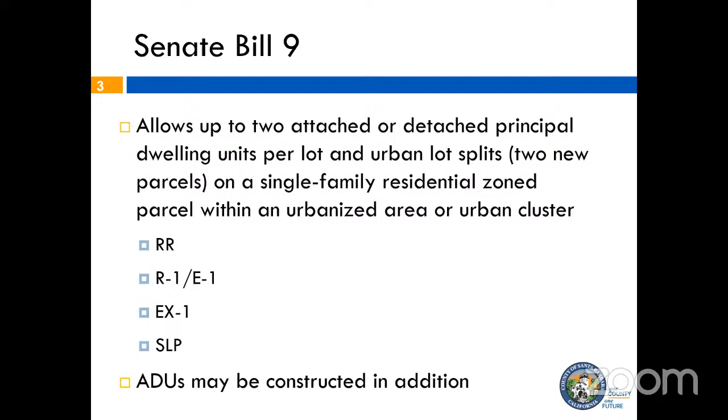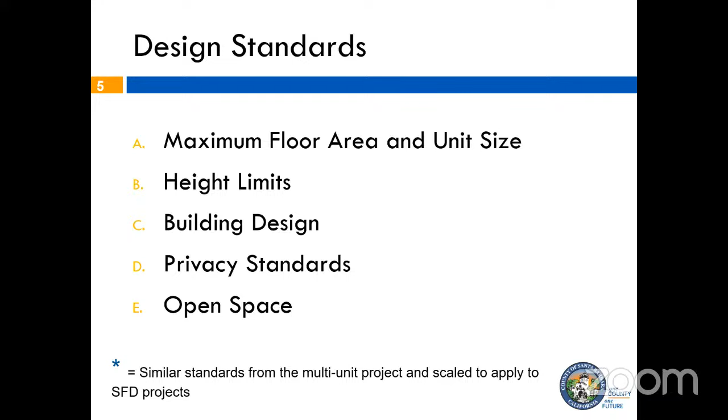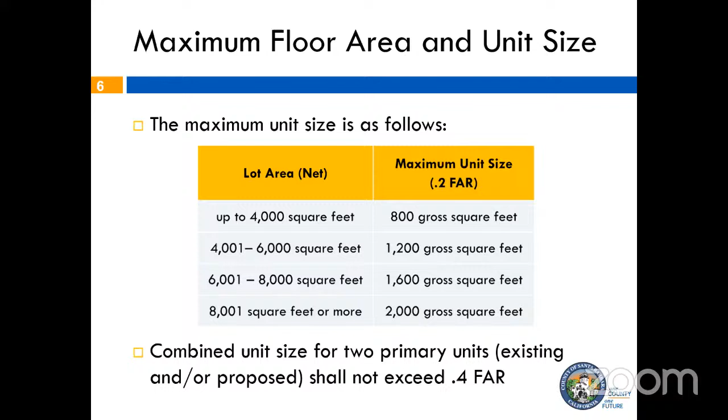Additionally, we propose to allow up to 500 square feet for an attached garage or carport with standard setbacks and the same architectural design, as well as an allowance of 20% of the floor area for the new unit to have an attached architectural feature such as a covered patio, porch, or deck. This is an approach we actually took from the ADU ordinance and carried over.

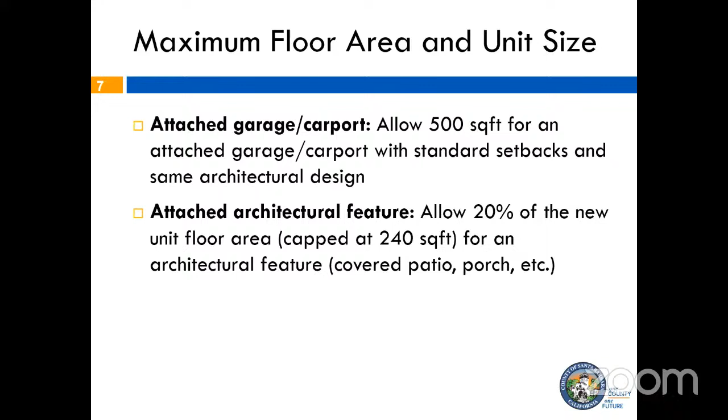For height limits, staff tried to find an appropriate limit that would still allow reasonable development while protecting neighborhood compatibility. We propose that new attached dwelling units not exceed the height of any existing primary dwelling unit on the parcel, or 25 feet and a maximum of 2 stories, whichever is greater. New detached dwelling units shall not exceed a height of 25 feet and a maximum of 2 stories. All new dwellings, attached or detached, would still need to comply with other applicable height regulations such as ridgeline, hillside guidelines, and height limits.

We also have one question to consider, which is whether to continue to allow an additional 3 feet for pitched roofs within the height limits.

Next slide. You have a question? Could you repeat the last sentence, please?

The additional 3 feet? Yeah, so we included for feedback that we would like to continue to allow an additional 3 feet for pitched roofs to be included in the height limits as part of the standard.

Just for context, she's talking about the ordinance where if you're on a hillside ridgeline, there's a maximum height, but there's a height exception where you can add an additional 3 feet if you have a certain pitch of roof. You see it most on hillside ridgeline lots where there's a max height of 16 feet, but they can do 19 feet with a certain roof pitch. This would just carry that same allowance over to this type of unit.

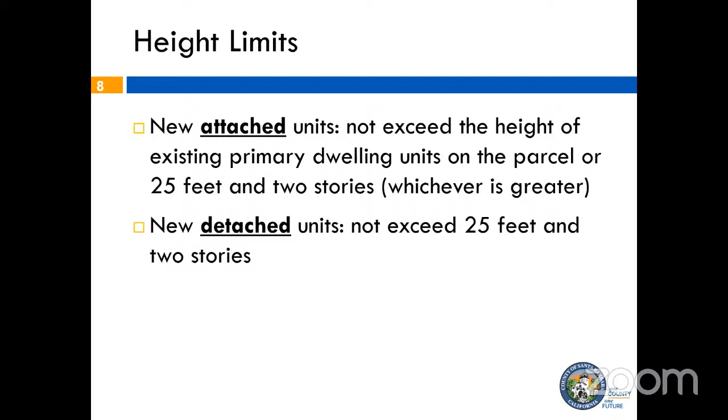All right, can we jump to the next slide and then jump into building design? Great. So for building design, for additions and new attached units, we propose that they be designed and constructed to match architectural style, colors, exterior building materials, and finishes. This would include siding, windows, doors, roofing, and so on.

Oh, the additions, okay. And then for all sides of the buildings, we propose that they shall be articulated with common details, materials, and elements. Also, for building facades greater than 30 feet in length, they shall include architectural elements such as a front porch, a balcony, an upper story setback, projections, recessions, things similar.

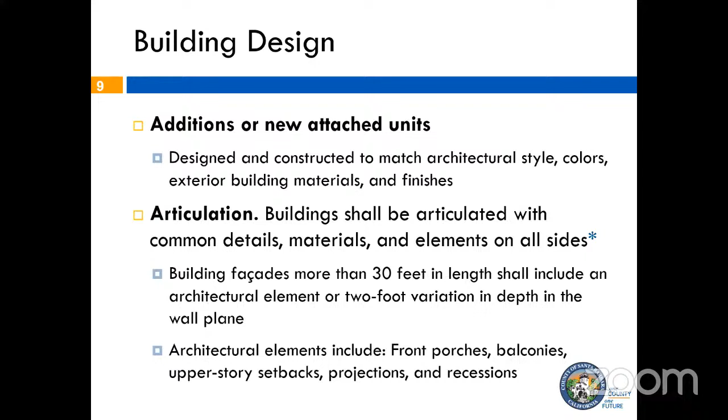Next slide. We're proposing that they incorporate recessed door and window openings, with a minimum of 6 inches for garage doors. All entrances shall have either a projected sheltering element or be recessed from the main facade, with the projection or recess having a minimum depth of 24 inches. For windows, they shall be either recessed at least 3 inches from the plane of the surrounding exterior wall, or have a trim or windowsill at least 1/2 inch in depth.

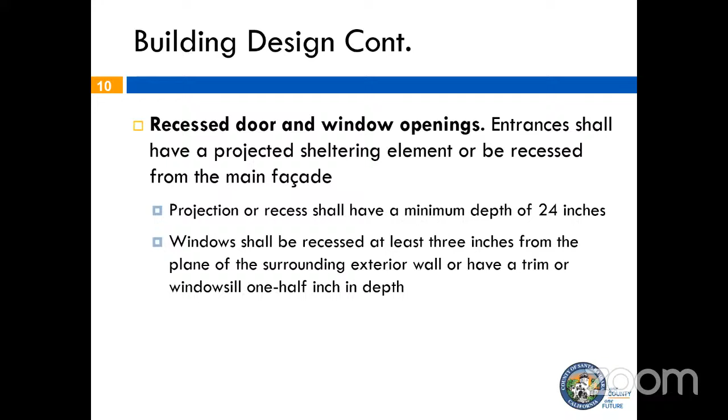We're proposing that exposed plywood or glass curtain walls be prohibited. The building must include at least 2 paint colors: one for the main wall color and another for architectural trim pieces, such as siding material.

For window frame materials and colors, they shall be used on all elevations. Do you mean window trim detail materials, not frame? It can include frame materials and also trim. If that's language you'd like us to add as feedback, we can include it. Being consistent on all elevations would be better, for both frame and trim materials and colors. Okay, we'll consider adding that in.

For transitions between colors or materials, they shall occur at inside corners of intersecting walls or architectural features. Before I jump to the next slide, do we have any feedback or comments on this?

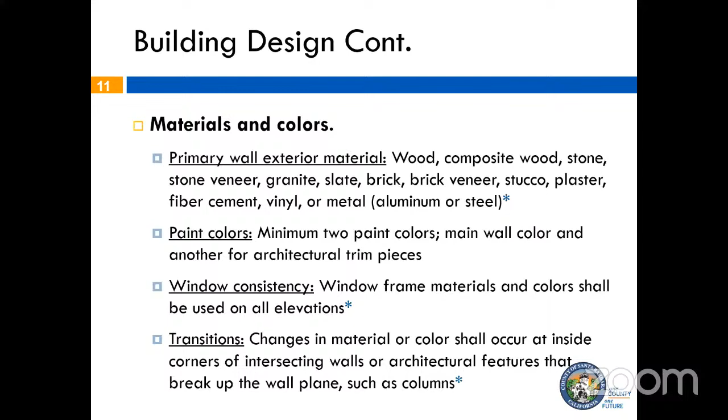For garages, they shall feature at least windows, a paneled door surface, 2 different colors, or alternative materials and finishes. What do you mean by treatments, 2 different colors? Does the garage door need to be multicolored? There are different options you can do. You can feature at least windows and a paneled door surface. You can propose 2 different colors for your garage, whether that's a specific trim around the windows and a different main color, or use other types of finishes and treatments. So there's flexibility on what can be used for the garage.

For sloped roofs, we're proposing at least 2 forms, whether primary and secondary. Shiny roofing and siding materials or glossy metallic finishes would be prohibited, and we'd propose a light reflective value percentage below 0.84 with a matte finish. For garage conversions, they shall replace the garage door opening with exterior wall coverings or residential windows and doors to match the existing exterior of the garage or residence.

Are we going to pause to talk about the garage conversion situation here? Sure, we can take some questions.

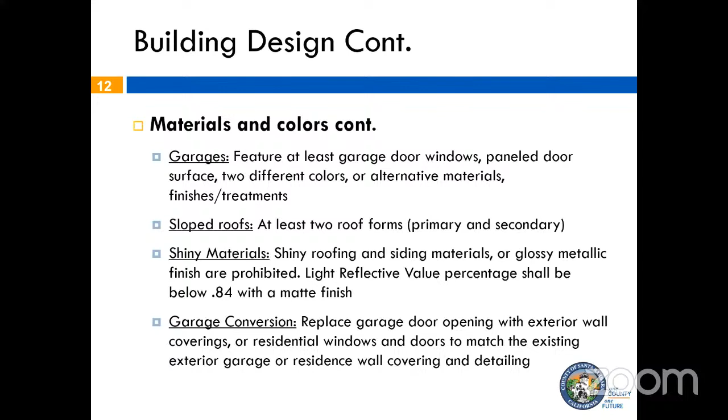For privacy standards, we're proposing to implement privacy standards for primary dwelling units that are either 2 stories tall or greater than 16 feet in building height. For example, any upper story unenclosed landings, decks, or balconies greater than 20 square feet that face or overlook an adjoining property shall be located a minimum of 10 feet from the side and rear lot lines and interior lot lines, unless landscape screening with a 6-foot minimum height is provided along the perimeter areas visible from the landing, deck, or balcony. We did receive feedback about increasing that 6-foot minimum height, so we're open to suggestions on that standard as well.

Is the 10 feet from the side the deck or the building setback? That would be the deck - so the deck has to be 10 feet away. Yes, it's 10 feet from the side and rear lot lines, as well as interior lot lines.

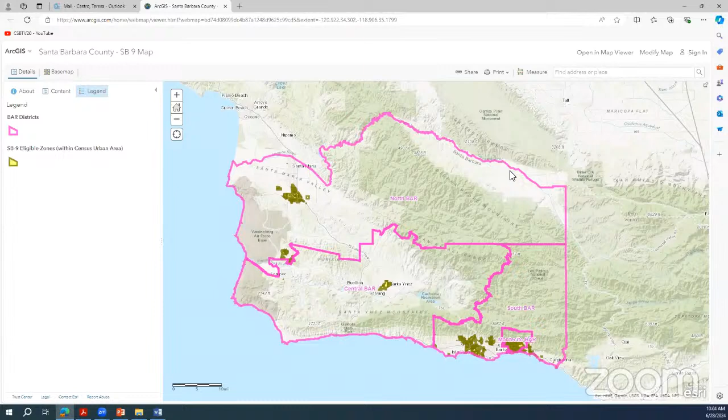Oh yeah, it's horrible over by there. No, we see that already. I mean, people can already basically build an ADU on almost any residential lot if they want to.

Great, thanks Teresa. So this is just an overview of those single family zoned parcels that would be eligible for an SB9 project. The link is provided to you guys in the box folder, so you can look at it at a later time in more detail. It's almost entirely the same. You can zoom in on each lot. It's kind of cool, the interactive.

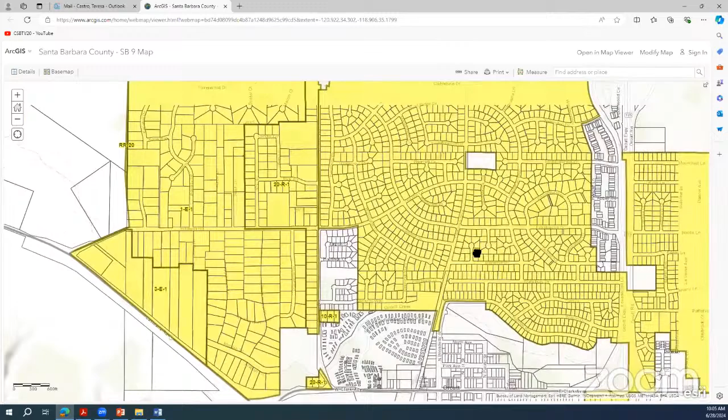So just as a quick overview of what has been provided to you guys. Teresa, do you mind pulling the presentation back up, please?

Shannon, can I ask you a quick question? Why are those other lots not eligible?

Karina, do you want to take that one? That's a mobile home park. So the parcels designated and labeled yellow that you see on the map currently are all RR, R1, E1, EX1, SLP. The state mandates that it's a single family residential zoned parcel, and these are those eligible parcels in these zones.

Teresa, go down on the picture. Okay, stop right there, I have a question. On the bottom left portion of the screen, there are actually 3 distinct different communities in a fairly large square, and then there's yellow in the middle. It looks like somebody's pointing their finger and bending it down to the right. So Oak Hill, actually there are 3 different communities, right?

To the left there is the old Elkhorn Golf Course. Then there's a portion of Oak Hill, which was an original portion of it. That's the yellow square piece, like the base of the finger. And then there's the finger.

Now why are the lots in the middle zoned yellow and the lots around it not? They have different zoning. But the zoning's the same. It's probably... that's zoned E1, yeah, it's because it has to be both zoned for that as well as be within the census tract for being an urban area.

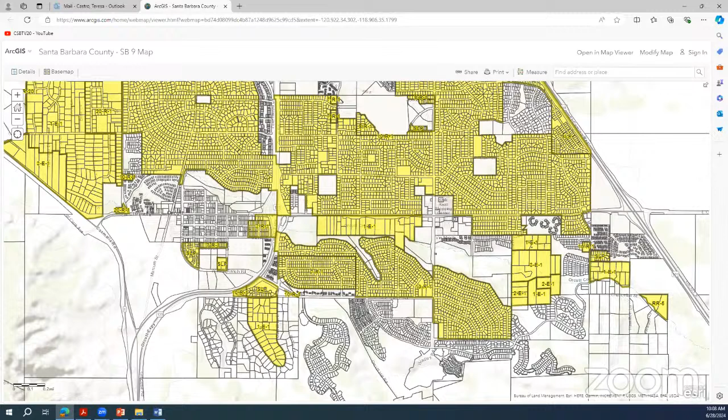All right, let's jump back to the PowerPoint. What's the timing on proceeding to the planning commission on this? After today, are you going to planning commission, or do we have additional time to provide better analysis from our end of the objective design criteria?

I think we still have a bit of time because we do need to collect all of the feedback that we've received and solidify the standards before we go to the planning commission. So we are anticipating going to the planning commission probably by the end of the summer, potentially sooner. We need some time to solidify the standards.

Yeah, this is the first time we've seen any of this, so that's at least understandable from my personal perspective. I would like to take some time to analyze some of these requirements and how they might be implemented, because I've seen this in the past in the city of Lompoc and in other communities where a bunch of new ordinances get thrown in there and nobody really understands how they're going to be implemented until you actually try to implement them. It can be really chaotic, because then you create a situation.

For instance, I had a project where it had a single family house and a 2-unit building on the backside, and the requirement was to provide bike racks for multifamily. They considered the 2-unit in the back as a multifamily building, requiring a bike rack, where all 3 units had garages, but the single family house was not required to. So the implication there is that a person living in a single family house can figure out how to put his bike in the garage, whereas the individuals living in the duplex in the back could not figure that out. Which was sort of a ridiculous requirement when it boiled down, although the idea originally was that for large multifamily projects, like 40-unit apartments or something, would provide storage areas for bicycles. It was never considered to be a little duplex sitting on a lot that would need a bike rack outside.

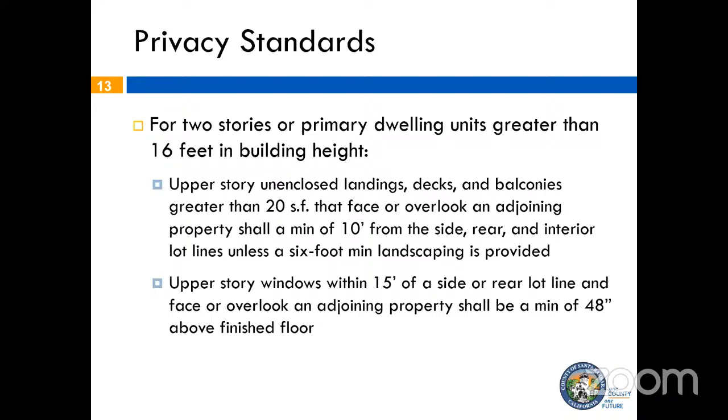Great, thank you. We're just going to jump into the next slide. I want to remind you all that we do have the telecom ordinance standards as well that we need to go over, so just a heads up.

For open space, we are proposing that private open space shall be provided for each residential unit at a ratio of at least 300 square feet for units that have 2 or fewer bedrooms, and for each bedroom in excess of 2, they shall require 100 square feet per additional bedroom. As I mentioned previously, this private open space must be directly accessible to the dwelling that it serves. It can be within the side and rear setback areas, but it cannot be in the front yard setback, which shall not be used to satisfy this open space requirement. Also, balconies, patios, decks, and unenclosed porches can be used toward this open space requirement.

This is either paved or landscaped, right? If it's, yes, it could be uncovered, paved, or landscaped patio space or open space as well, like a grassy area for example. One thing to note is the minimum width of this open space area shall be at least 10 feet.

And this is the last standard for Senate Bill 9. Before I jump into telecom, is there any comments on this open space requirement that we're proposing? We talked earlier about landscape. Is there any landscape requirements that you're proposing?

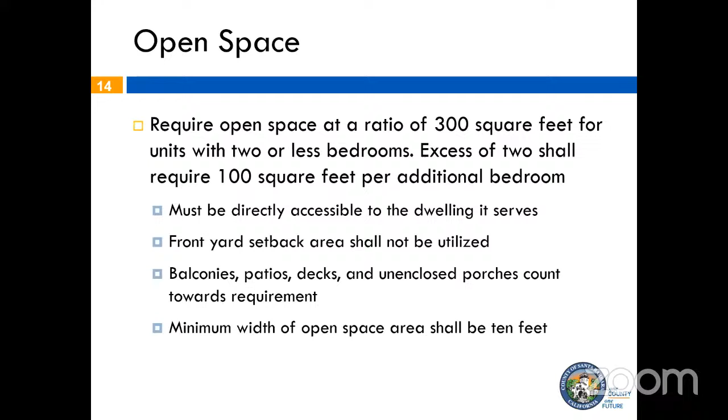Great, can we jump to the next two slides? Thanks, Teresa. All right, so for small wireless facility projects that would meet these proposed objective design standards, they would be exempt from design review. These proposed standards would essentially take the place of the BAR design process, and would apply to facilities mounted on structures 50 feet or less, located on existing or replacement utility poles, non-pole concealment structures, roof of an existing structure, or vaulted underground.

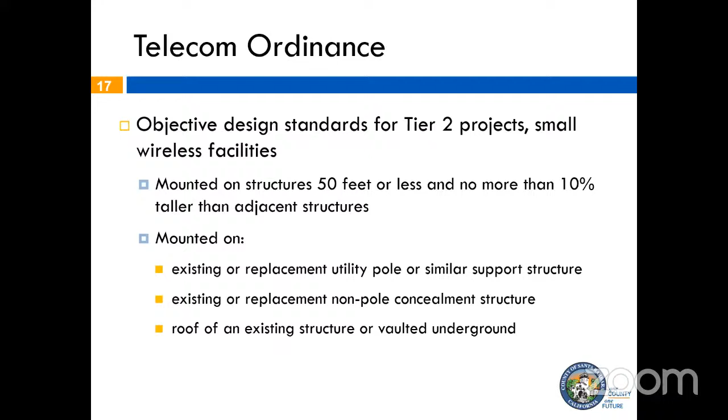Next slide. And here's just a list of the design standards I'm going to be going over. Next slide.

So we're proposing that all small wireless facilities be stealth as technically feasible, with concealment elements that mimic or blend with the underlying support structure, surrounding environment, as well as adjacent uses. So for new installations, antennas and associated equipment shall be fully concealed within the structure. And if concealment is not compatible with a pole design, it must appear as an integral part of the structure or mounted as close to the pole as technically feasible.

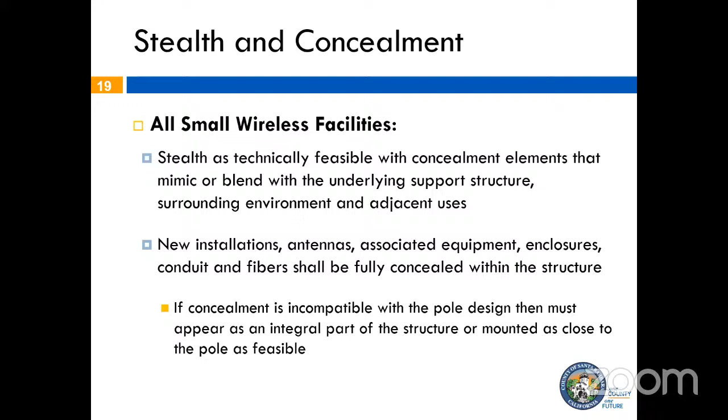Next slide. So for all cables, wires, and other connectors, they'll need to be routed through conduits within the pole and concealed from public view. Any external conduits or shrouds must be finished to match the underlying pole. Excess cables shall not be spooled, coiled, or stored on the pole's exterior. And then for pole-mounted accessory equipment, they may be installed behind street, traffic, or other signs, but must be placed in a location that is most concealed.

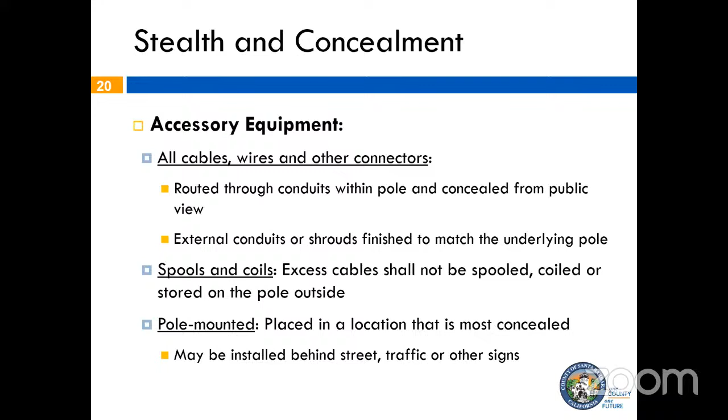Next slide. So all exterior surfaces shall be painted, colored, or wrapped in flat, non-reflective hues that will match the underlying support structure, and also treated with graffiti-resistant sealant. All new poles or structures will need to replicate materials, colors, and finishes of existing infrastructure nearby. And then for all replacement poles or structures, they'll also need to be of the same material as the existing poles or adjacent poles.

What does the middle one mean, to existing infrastructure nearby? If you're putting a pole up, what are you trying to match? So if it's a new pole, then you're just trying to match whatever is existing nearby. So if there's other poles, wireless facility poles, the intent is that they match those. Match other poles that are nearby. Yes, for compatibility. I don't know what you're trying to match, yeah really, that one's a little nebulous.

The first one has some pretty bad implications also. If you're putting up a new structure and somebody wants to use the faux trees and that kind of stuff, how does that relate to matte finishes? Maybe the leaf structure doesn't work in a matte finish. What's the intent? These are smaller, these standards are for small wireless, so more the tier 2 type of facilities, so it wouldn't be for those faux mono pole types.

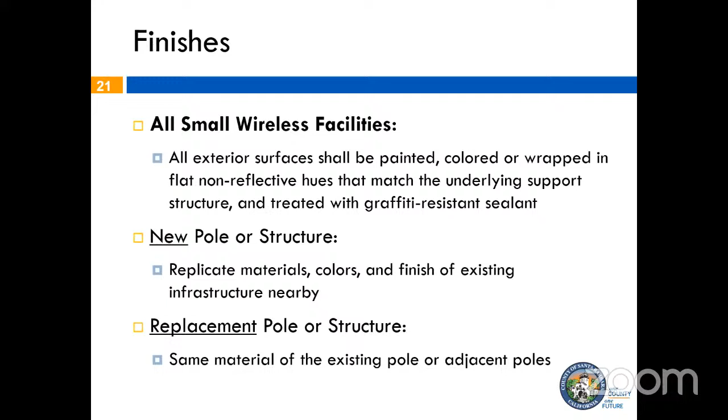That has an example, thank you. So here's an example of a tier 2 project where the antenna canister and shroud is being proposed to match the existing poles, materials, and colors. So it's a smaller scale type of wireless facility project. So there, if they put up their own pole, they'd have to put up a wood pole as opposed to a metal pole, I guess. Okay.

I got one other question then. Has anybody checked with the telecommunications companies about the proximity of one antenna to the other? Do these things actually work in that tight of proximity when you have the omni-lobe antennas, which is what they're showing there on the picture to the right? Do they work in that close proximity to each other? Or have you just tied their hands to the point where they can't put one up?

I don't really have the expertise to comment on that specific question. Alex or Shannon? I'm not sure I understood the question, could you rephrase or restate?

In the omnilobe antennas shown on the pole on the right-hand screen, you're showing two separate kinds of antennas. One is up on top, and then there's an omnilobe antenna on the bottom. You're hinting that there's one on each side of the pole, in threes. Most of these cell towers have tri-lobed sets of antennas. I don't know if there's any restriction on the location of those individual antennas in relationship to each other.

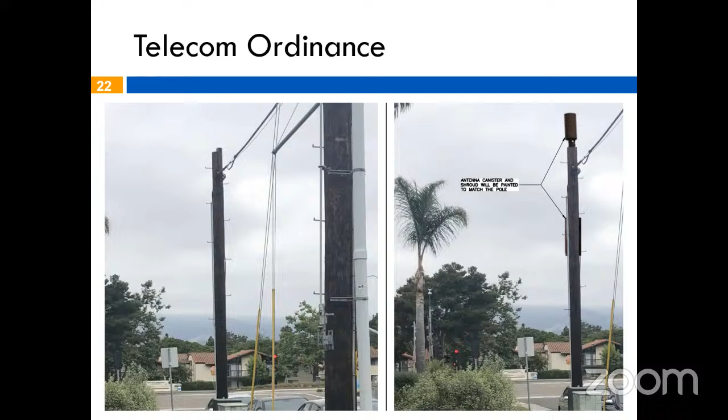Teresa, can we jump to the next slide, please? So in regards to shrouding for all antennas and associated equipment, they shall be installed within a single shroud or radome if feasible. Pole top antennas shall be visually consistent with the design, color, and scale of the underlying pole, and not exceed 2.5 times the median pole diameter. For side arm antennas, the shroud must cover the cross arm and any equipment between the vertical riser and antenna.

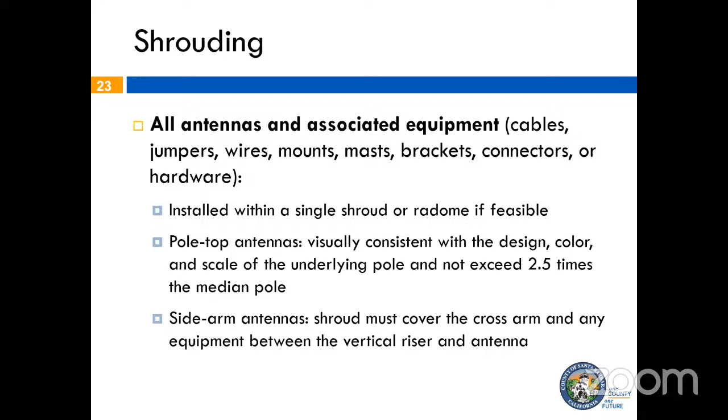Is the 2.5 times the diameter? I believe so, yes. Can we jump to the next slide, please?

And both of those would be complying? Yes. Okay, can we jump to the next slide, please?

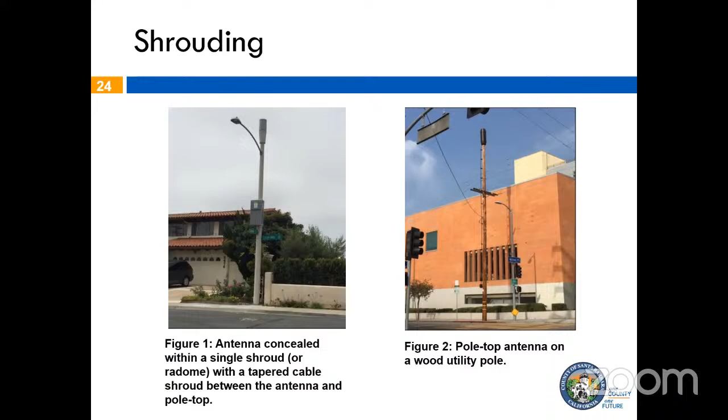Most people are never going to notice it. So for horizontal extension, side mounted antennas are prohibited unless infeasible. They shall be placed as close to the support structure as technically feasible, and may not extend more than 24 inches over any roadway or abutting private property. For pole-mounted accessory equipment, they shall be flush with the pole and not extend over any roadway or abutting private property as well.

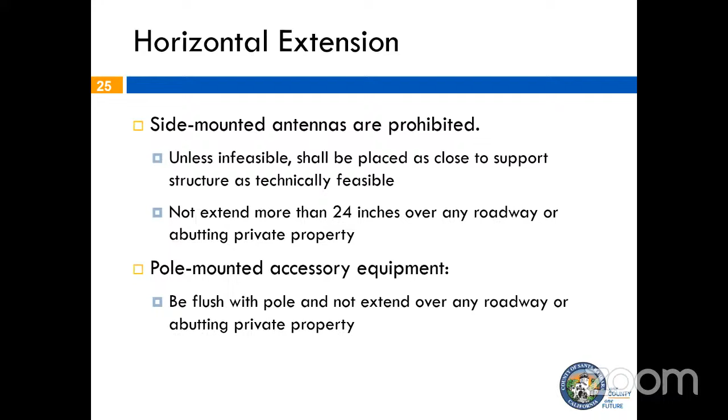Next slide. Here's an example, figure 3, a shrouded side mounted antenna on a wood pole with horizontal separation. Figure 4 is a pole mounted accessory equipment shroud on a wood utility pole.

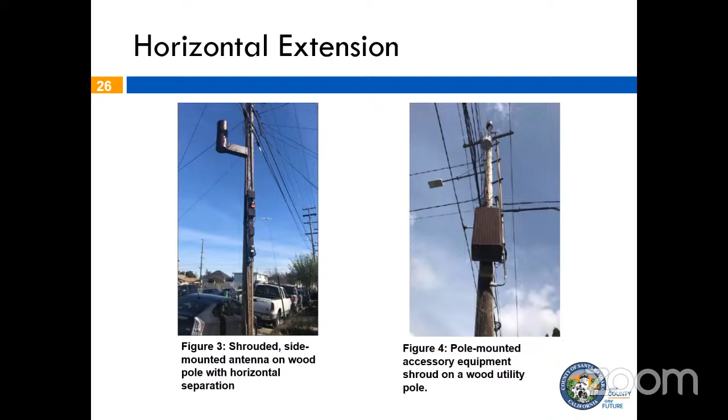And again, are these both compliant? Yes. Okay.

So all accessory equipment shall be placed underground in an underground utility district, or in a location where the director determines above ground accessory equipment would restrict the public's rights of way. Equipment shall be installed in a load rated vault with a slip resistant cover if beneath the sidewalk, and airflow vents shall be flush to grade and may not exceed 2 feet above grade.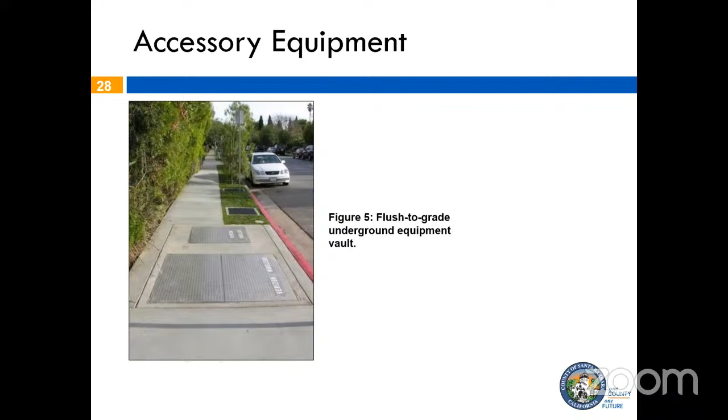And finally, the minimum ground clearance for accessory equipment shall be at least 10 feet above ground level. For orientation, unless they're behind a street sign or concealment that dictates the equipment orientation on the pole, all pole-mounted accessory equipment shall be in line with the adjacent road, or oriented away from the adjacent road when concealed by landscaping or existing vegetation.

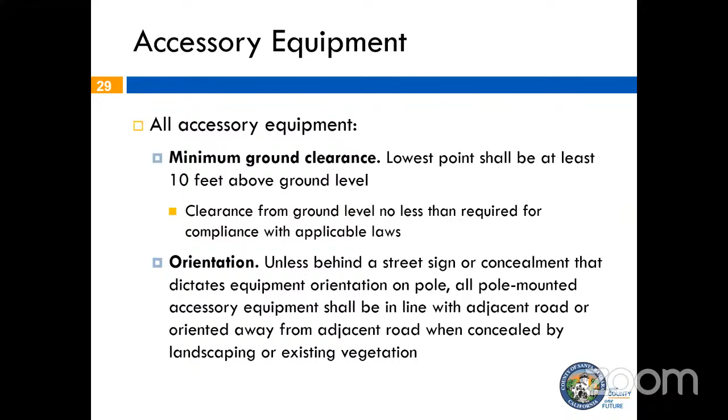Next slide. And that wraps up the telecom objective design standards. Do we have any questions, comments, or feedback?

We generally don't see once they're 50, the tier 2 here, right? I don't think I ever recall seeing one. I don't believe we ever have either. With what you're proposing here, doesn't seem unreasonable to me. No, it seems fine. I would say most tier 2 are in the 35 foot range because they're mounted on existing utility poles, which are usually in the 30 to 35 foot range. Yeah, this doesn't seem unreasonable at all. And the vaults, that's kind of been consistent with what electrical vaults for years have been, that way.

I just also want to remind you all that for these standards, we did look at the city of Santa Barbara's and used their standards as an example for ours. No, I don't have any comment. I think they're fine personally.

Great. Do we have any last comments or suggestions for Senate Bill 9? And then do we need to come back at the next meeting? I still have a general question about the Senate bill.

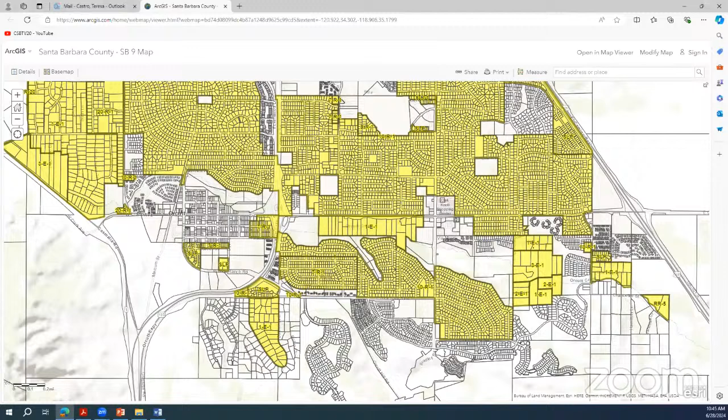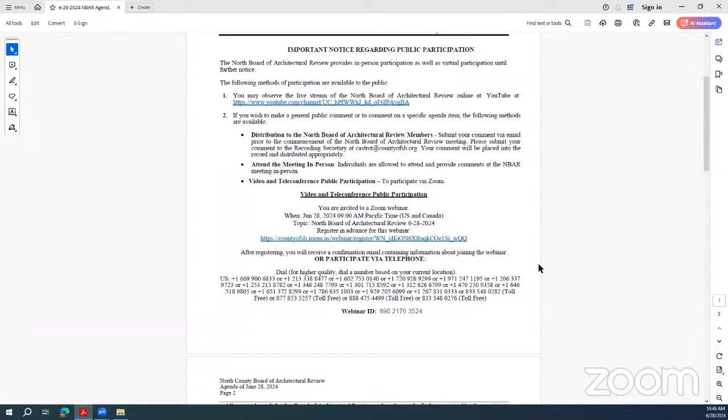Well, that's all the state law is - they just amended it to something different. I've seen these things happen where the state law says you can do this and the HOA says you can't. The HOA has to change. In an HOA, it requires everybody to have goodwill in the community. Otherwise, you're in lawsuits and nobody does it. Most HOAs don't want to go to court because it costs them a bunch of money. Well, there are still HOAs that have racial requirements left over in their CC&Rs.

So, laws change, obviously. But is this an agendized item? Are we going to make a motion to close the meeting and then continue? We can't discuss in a closed meeting - that's against the rules. We have a quorum, we can't discuss after we close the meeting. I think what we gotta do here is discuss internally some of this stuff. The HOA isn't really an issue germane to this particular discussion.

It doesn't look like HOA enforcement is going to be an issue to us either, or like any of this is going to be an issue if they pass it anyway. We're not going to have any oversight. Well, the HOAs that are large, like Elkhorn, the houses are too big to have two units on it anyway. But there's room on the lots to put other houses, and room to put an ADU, probably attached.

I think we should just reiterate what Karina and Alex conveyed. This law applies no matter what. People are already utilizing it. This is adding to what the county can restrict. So all that's germane to what they're presenting is what the county can apply in addition to what the state already requires. It's like what we did with ADU laws - yes, we have to allow ADUs. If we don't have any ordinance in effect, we default to what the state applies. But if we pass an ordinance, there are some things we can regulate - it's the same principle here.